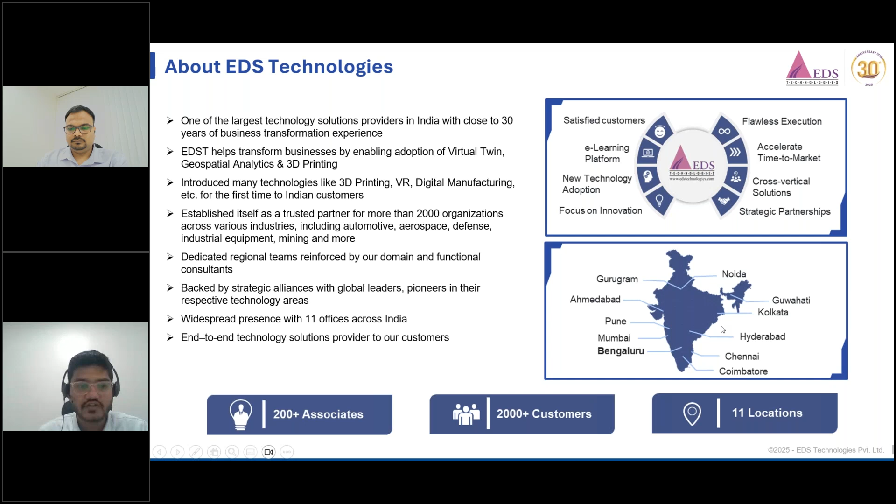In the field of GIS and location analytics, we have a strategic partnership with Esri, and for electronics design automation, we collaborated with Synopsys. We have our dedicated sales, marketing and customer support teams to ensure we meet all customer PLM business and service requirements efficiently.

Before we move to our today's speakers and technical presentation, I'd like to take a moment to give a brief about NCAM and EDS Technologies' partnership for promoting additive manufacturing technology in India.

NCAM, the National Center for Additive Manufacturing, is a key initiative supporting the advancement of additive manufacturing technology in India. NCAM is a Section 8(1) company established by the Ministry of Electronics and Information Technology, Government of India, and the ITE&C Department of Government of Telangana, in partnership with industries.

The vision is to build a comprehensive additive manufacturing ecosystem in India and to position the country as a global hub for additive manufacturing. Through collaboration with organizations like EOS and with support of NCAM, we are collectively driving the adoption and industrialization of additive manufacturing technologies across various sectors.

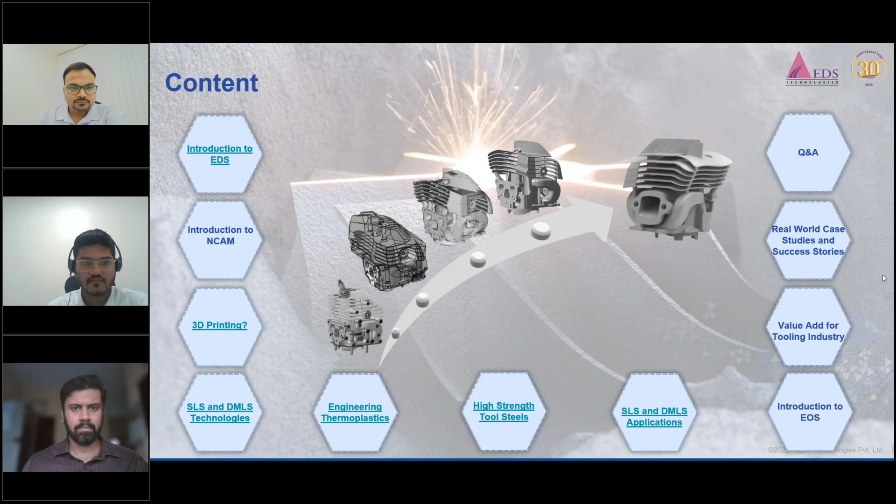So what is 3D printing? Basically, 3D printing is a method, or we may call it a process, to convert digital data into the form of physical parts. So it may be direct castings, or a direct polymer component, metal component, or ceramic component.

3D printing is solving a lot of industrial challenges in a very rapid way, so some people call it a rapid manufacturing process also.

So the steps and workflow begin with you needing a CAD model, and then we prepare that CAD model, which involves some amount of programming or CAM, depending on the different 3D printing processes.

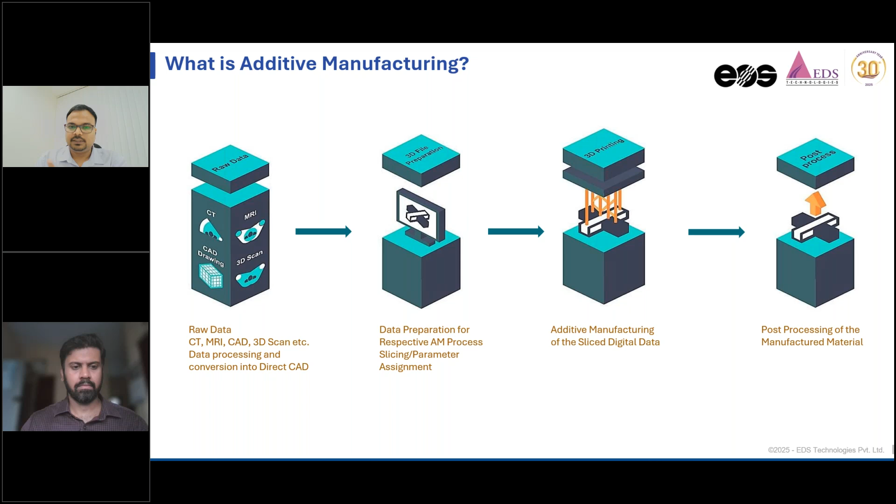We do slicing of the model, dividing it into detailed slices and information, and then we send that information to the respective printer and get our job done. After the 3D printing has been done, some amount of post-processing is done, depending on different 3D printing processes, to achieve the final component. So that's the typical 3D printing workflow that involves these stages to arrive at the final component.

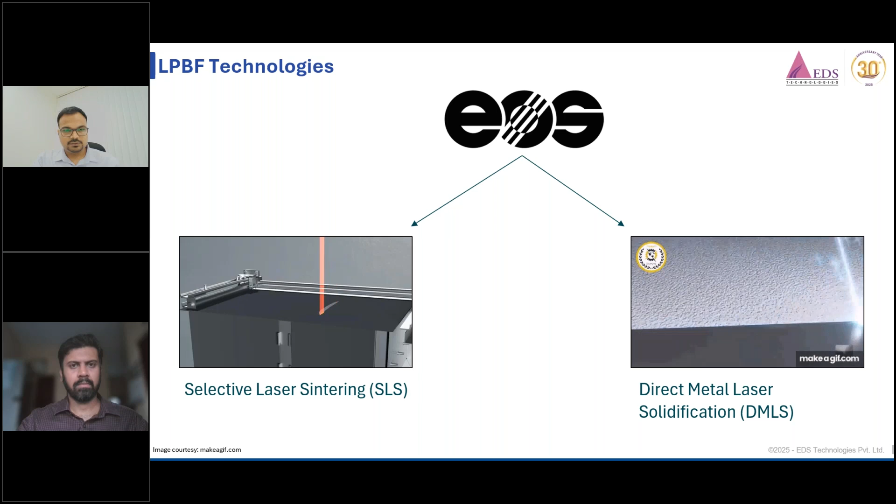With EOS, we bring the technology to India, two technologies basically. One is selective laser sintering, which is melting high performance thermoplastic materials such as nylon 11, nylon 12, and their other filled composites. And on the other hand, we have direct metal laser solidification, the DMLS process, which melts different metal alloys - it can be aluminum, titanium, copper, or even high strength tool steel. So it's possible to actually get the tool you use for your daily injection molding or pressure die casting using our DMLS process.

So we'll be discussing about these. Let's understand what the SLS process is.

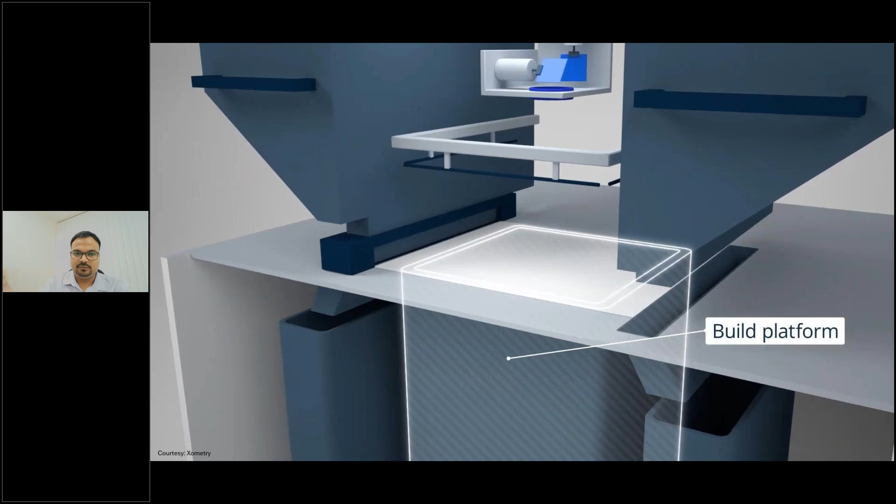So we have taken an illustration here of our P3 model, where you can see the dispensers are kept at the top, full of powder. That powder is supplied and spread over the platform - that is why it is called laser powder bed fusion. So we spread the powder, and then there is a laser at the top.

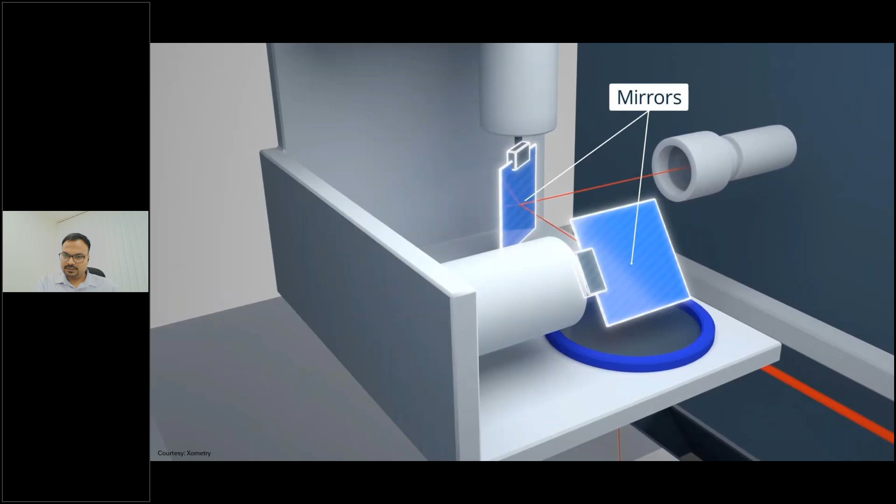There are heaters which preheat the powder during the process, and then the laser selects the areas. If you remember the slices we mentioned, those slices are addressed by these laser units, and just at those points the powder gets melted and fused - this is what forms your actual object. It happens in microns of layers, so it's basically a layer-wise process until your job is completed. It continues - the platform goes down, spreading happens, and the laser just addresses those areas.

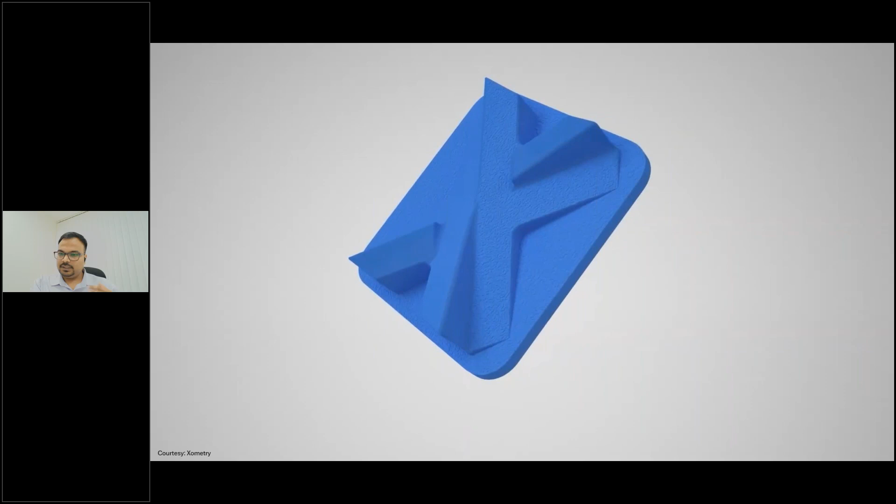So what happens at the end of the process, we take out the exchangeable frame - you may understand it as a printing bucket. We take out the entire bucket from the machine, then take out the powder cake, remove and separate the powder, and take the usable part immediately. So right after printing, the parts are usable in the SLS process, very functional without any hassle, which we'll discuss later.

So what happens to the powder after printing is over? Whatever leftover powder there is, we sieve it so impurities can be filtered, and we mix it with new powder. The mixing starts from 20% to 30% new powder, and nowadays we're able to claim a large amount of the powder - around 70 to 80% is being reclaimed from the previous cycle and reused. We call this refreshing - we refresh it with new powder, and then that powder is ready for use in the next cycle.

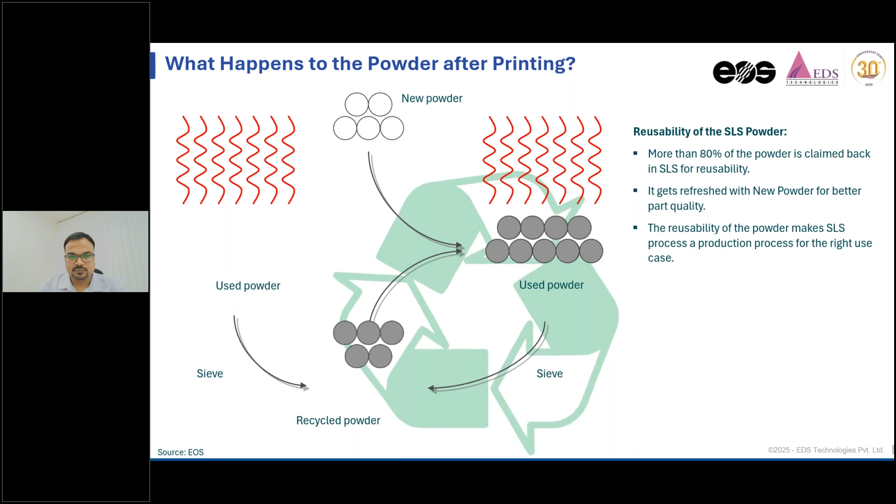This makes the SLS process more sustainable, where we are able to achieve more economy in producing the component. The cost per part drops drastically, and that is why we say the SLS process is becoming more of a production process - you can consider it that way.

So what all kinds of needs does SLS fulfill? Whether you want your prototype done, it will address that, or if you want your functional part - if you want to integrate any functionality, just like inserting a brass insert with threads, that will be taken up by all of our thermoplastic ranges. All of these parts are fully functional, and you can even do testing on the SLS component.

The other use case can be during your production process - you can print your fixtures, packaging, handling attachments, or any other fixtures or jigs required for simplifying your process. SLS will cover all of your needs during product development, operations, or production.

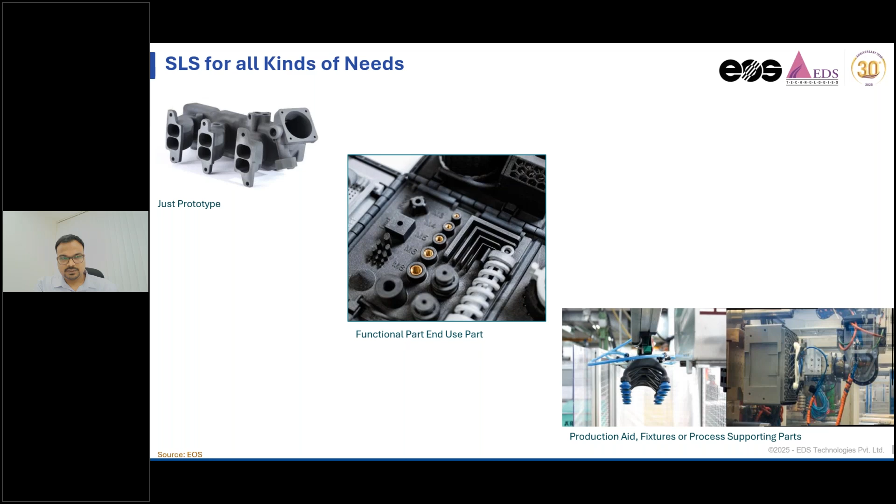SLS is actually driven by a laser. The laser is the heart of the process, and the laser spot diameter is in the range of 500 microns. It is able to produce very detailed geometry, starting from 0.6, 0.7 mm of the polymer component. So whether your component is a small scale part, a mid scale part, or a large scale injection molded part, all of the parts can be printed using the SLS process.

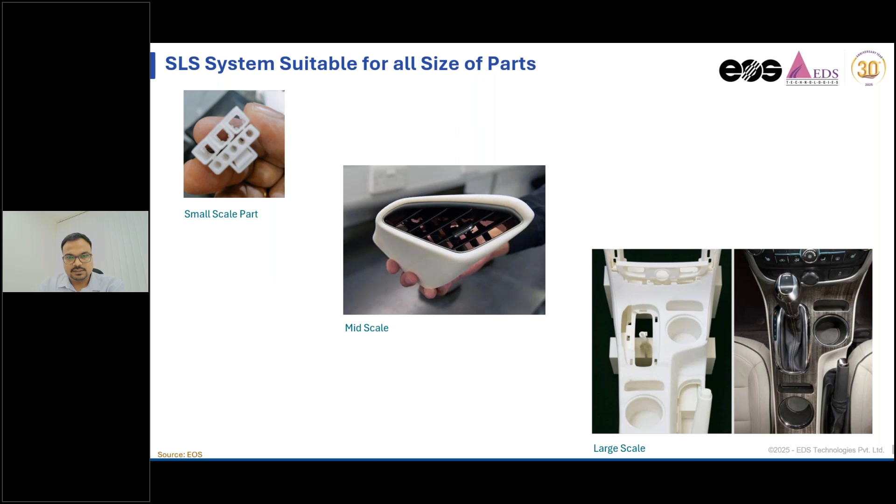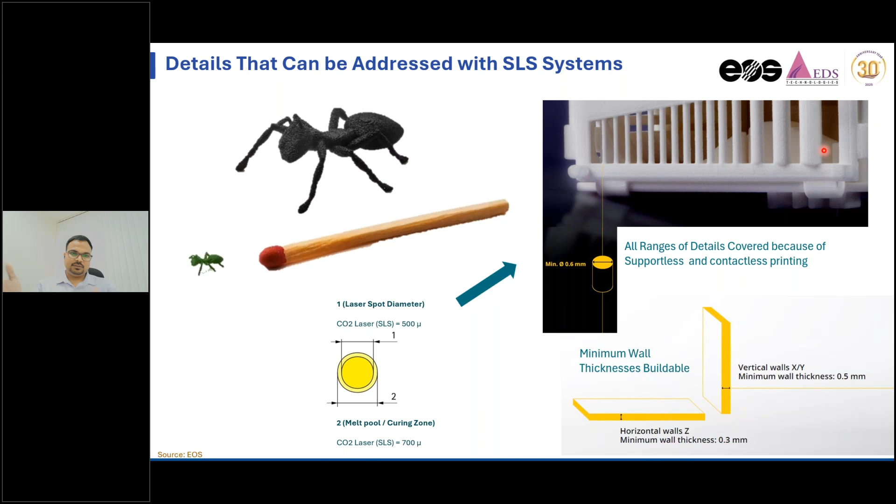What amount of detail can it address? As mentioned, it is able to address starting from 0.5 mm, because the laser diameter is 0.5 mm. So you can see the horizontal walls that can be manufactured. The minimum wall is ideally 0.3 mm, subject to the overall component size, and the vertical features that can be printed are 500 micron through the process ideally. These are the results you can see, starting from this size of feature all the way to the size of the bucket, that we are able to print and address today.

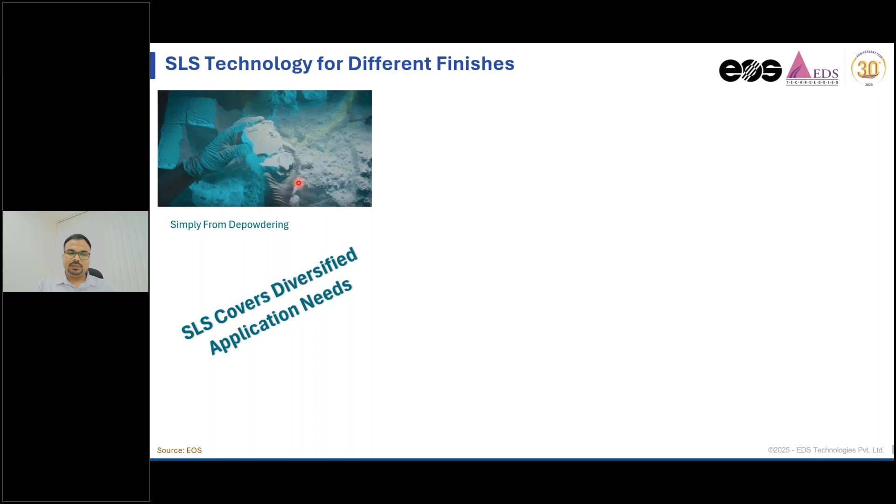What finish is achieved through the SLS process? Right after you get your part printed, you have to take out the cake along with the powder and the component, which we call unpacking. So we seek the component out of the powder bed, and this is the finish achieved right after the process. If you are okay with monocolors, white or black, the SLS parts are directly usable at the first moment. And if you want any further aesthetics, you can dye them, paint them, and coat those surfaces so they become aesthetically more appealing.

In any case, SLS parts are being used in the industry for different purposes, whether it is the component needed for aesthetic or styling needs, functional needs, or for testing.

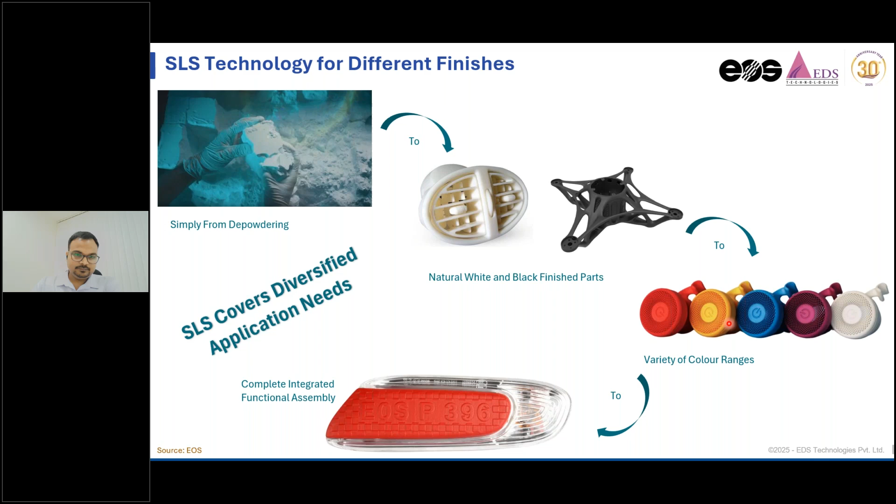So we have systems to demonstrate. This is our P110 system that we normally provide as a solution in the industry. This can accommodate roughly 20-25 centimeter components. The system holistically produces more than 600 kgs of polymer material in a year. That is very suitable for a studio friendly environment, R&D and batch production, and even for sampling if you want to do sampling for your customers in injection molding.

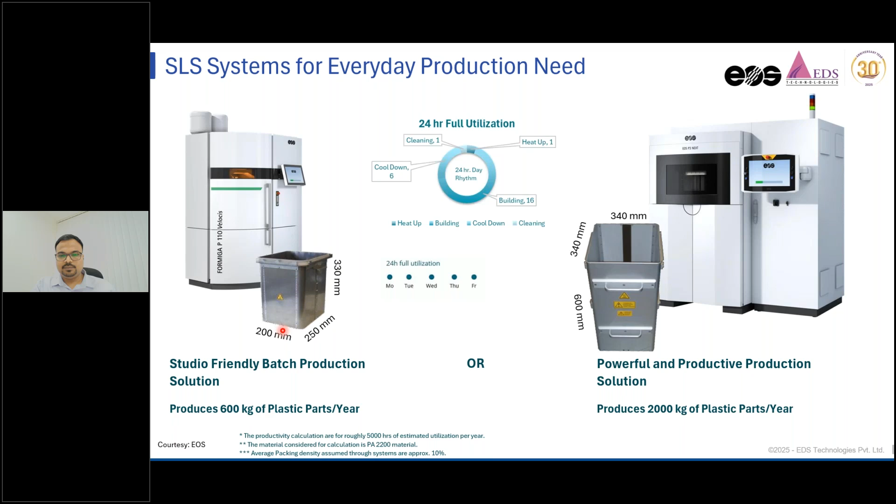Then we have our flagship machine, P3 Next, which is way ahead in the segment and produces more than 2 tons of plastic parts per year today. You can imagine these machines as daily production machines for your day-to-day plastic component manufacturing.

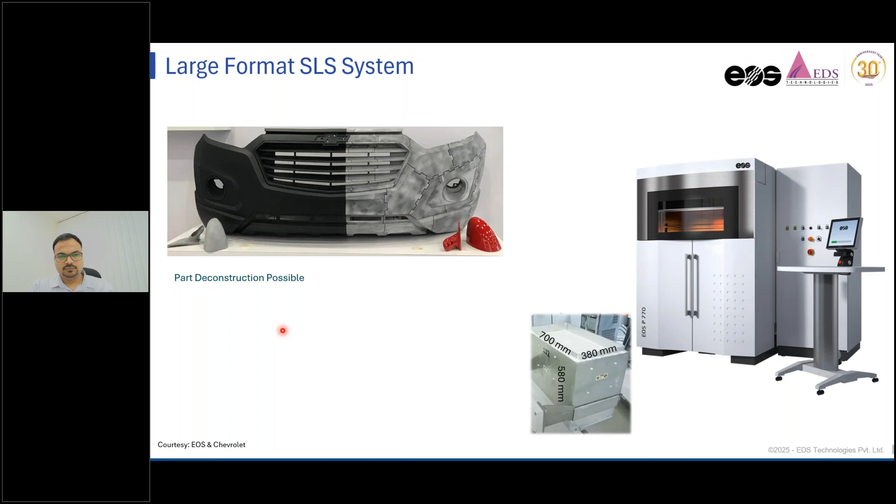We also have large format SLS printing. If your component doesn't fit in one go in the printing volume, the concept is we need to split it and then manufacture it, which we call deconstruction. So we have a large format printer with dual lasers, able to address 0.7, 0.8 meter kind of dimensions in one go. You can imagine large components for exteriors and interior components, and of course large components in automotive and different industries.

What materials do we offer in SLS? Today we have nylon 11, the whole nylon 11 series, and nylon 12 series for different applications. We have pure nylon 11 in white color and nylon 11 in black color. We also have nylon 11 climate neutral material, which leaves almost no CO2 emission behind when manufactured. We have flame retardant material for day-to-day applications, for the EV market and others which want flame retardancy features. We have direct material for that.

We have composites with us. In nylon 12, we have highly reusable nylon 2220 today. If you remember the refreshing ratio I was discussing, in this material we are able to claim 70% of the powder from the previous cycle. And in a material called PA 950 HD, we are able to claim 80% of the powder from the previous cycle today, which makes it more economical and adds more reusability in the process, making it more sustainable in production technology.

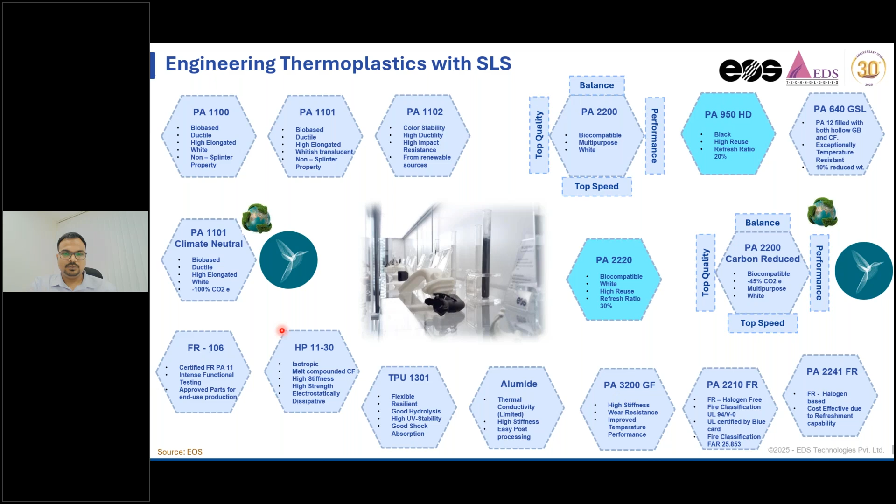We have PA 640 GSL, which is 10% lighter than normal nylon material, used for lightweight applications, and it's a carbon-filled composite material. We have glass filled material and other flame retardant nylon 12 materials, which are used for flame retardancy. We have an aluminum and nylon mixture, and a flexible material called TPU, which is a rubber-like material for different applications and industrial needs. Most of these materials are biocompatible and very safe during the process, so there is no hassle in operating the systems and handling the material.

When I speak about the benefits of the SLS process, it has many benefits. First of all, you don't need any tool to get your component. Unlike other 3D printing processes, it doesn't have any support structure involved, so you get your component directly without support structure.

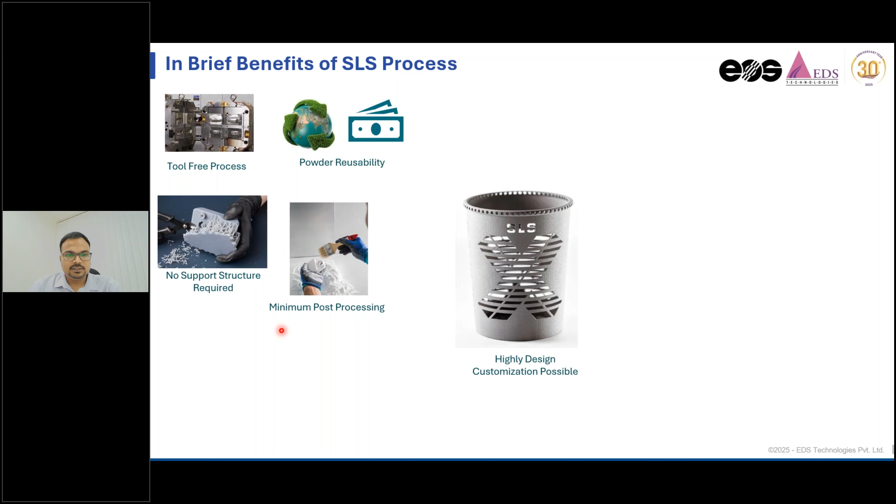Because of high powder reusability, these are more economic. There is very little post-processing, so immediately after printing you can start using the part. And because there is no post-processing involved, you don't need to use any chemicals or washing processes typically done in 3D printing.

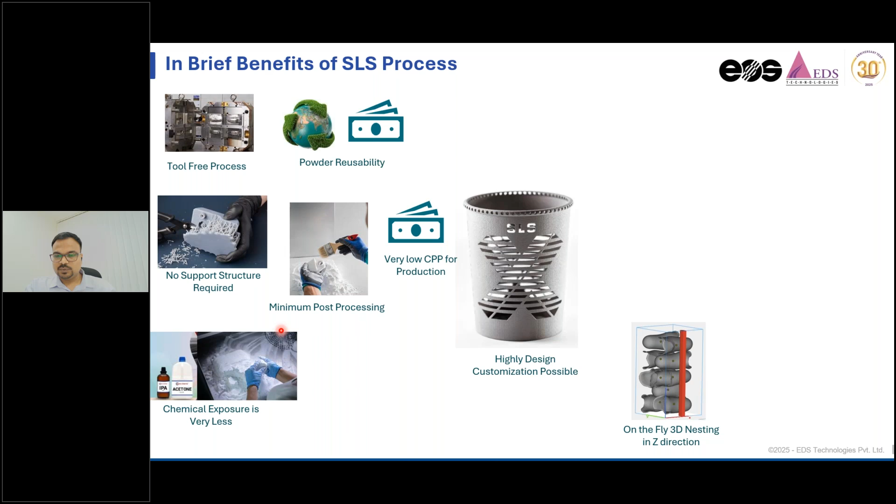You can imagine completely filling your printer and using every corner of the space during the process - we call that 3D nesting. You can directly fill as many components as possible in this space and use the printer as a production machine, which makes the cost per component very low.

We have glass-filled materials which are more robust, used in high strength polymers. We also have high temperature service materials and flame retardant materials with us. There is no post-curing, as I mentioned - not much post-processing, so there is no curing, and immediately after printing the parts are usable. There is no UV damage, and all of these materials are fully functional, so they integrate all conventional means. You can actually insert functional inserts and use it multiple times. So this plastic performs very well, just like injection molded plastics.

We have fine detail resolution with us, FDR, which is able to address features as low as 0.2 mm, used for very miniaturistic designs to be addressed and printed. And we have watertight material - immediately after 2 mm, you can claim water tightness on our component. So these are all the benefits of the SLS process.

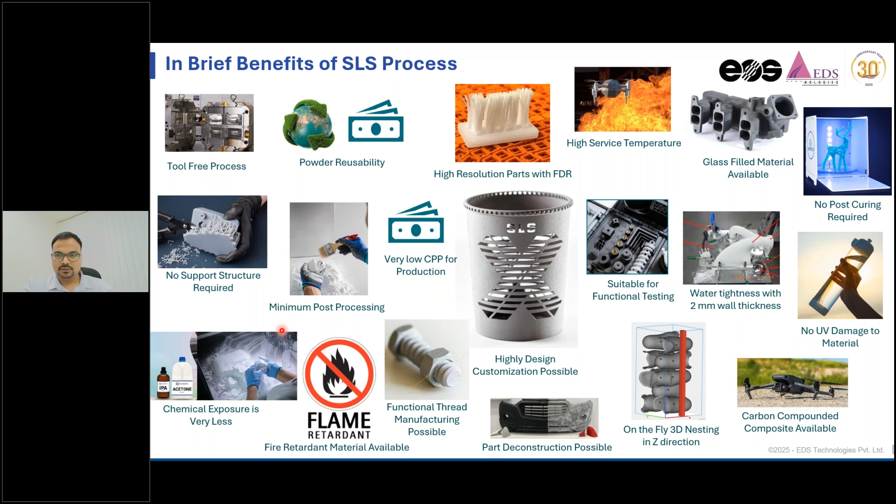Now let's have a look at the metal printer, which is DMLS. This is our M2 machine, and it's basically a micro welding, automated welding process which happens in an inert atmosphere. You can directly get your castings and toolings done out of it, including injection molded tool inserts and pressure die casting tool inserts directly.

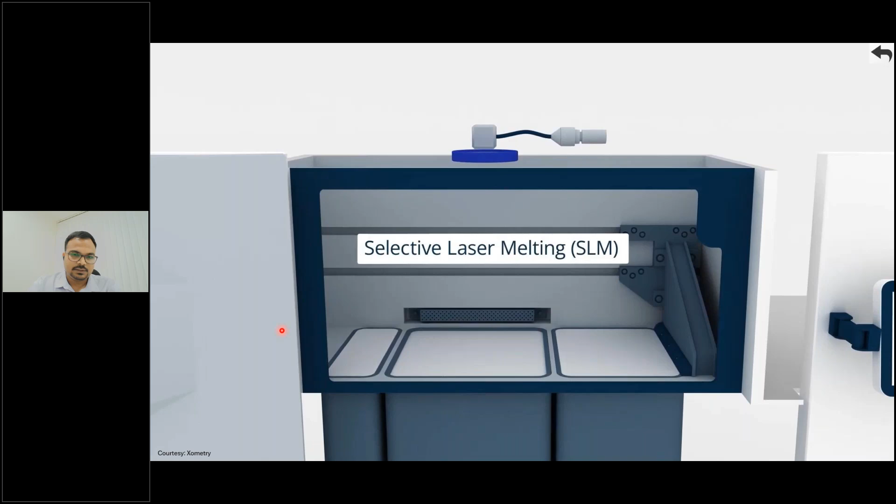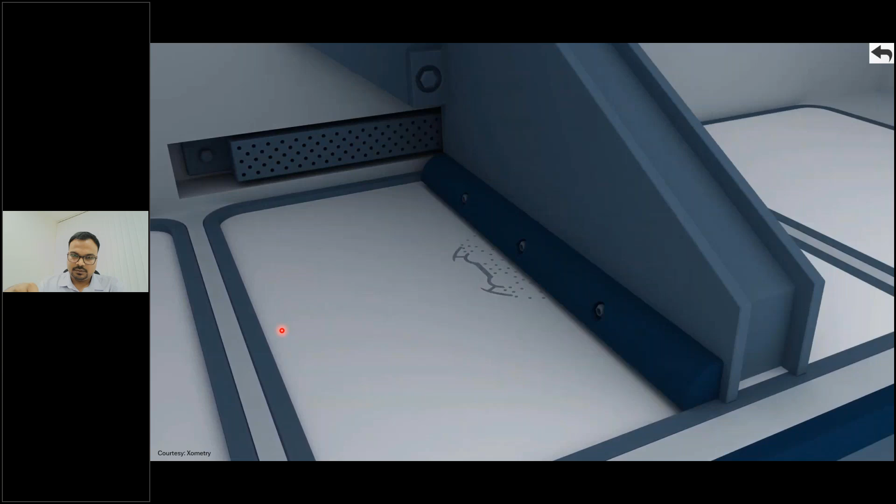We have a lot of materials to offer, including high strength tool materials. As I said, it happens inside an inert atmosphere like argon or nitrogen. The powder is fed from the bottom to top, and the recoater recoats the powder in very fine layers since it is a powder bed fusion process. On top, there's a fiber laser which melts the powder completely - more than 99.5% to 99.6% density is achieved across aluminiums, and in steels you get 99.7% to 99.8% density in your tool. So these are completely solidified materials that you get out of this printer.

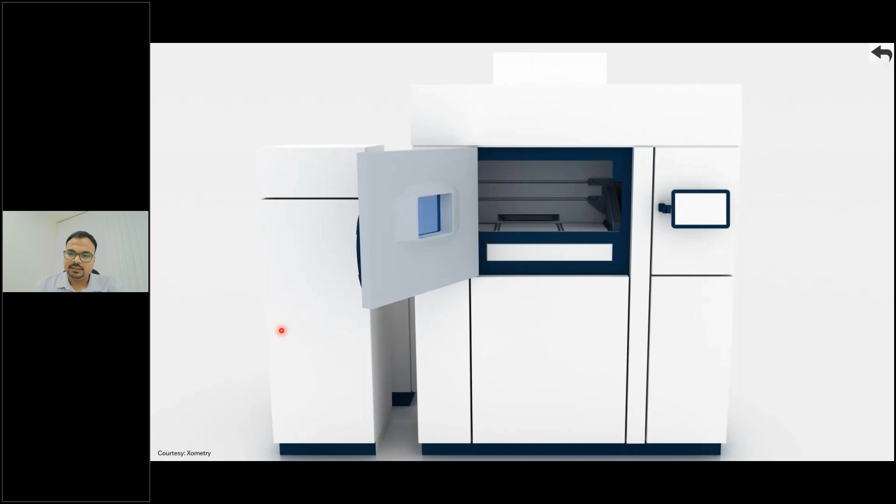And it addresses very minute details. The laser diameter is just 18 microns, so it is able to print features starting from 100 microns during the process.

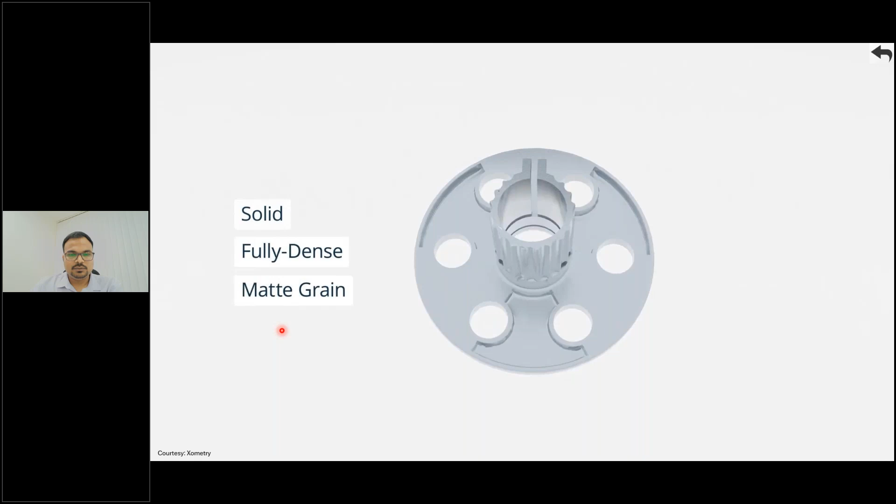Immediately after printing is done, we take out the model and put it in the furnace for relieving the residual or thermal stresses induced in the part, remove the support structure, and do the desired post-processing to control tolerances and get your functional component. So these materials are directly machinable - you can do EDM, wire cut, or in fact any kind of post-processing. You can even do hardening after printing, after the heat treatment is done, to improve the surface hardness.

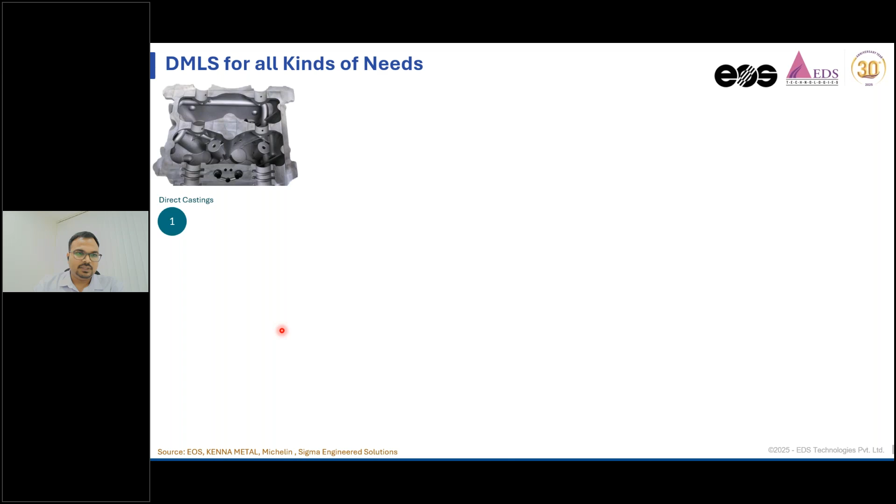So what DMLS addresses for the tooling industry is that your direct castings can be printed, whether ferrous castings or aluminum castings, in a very great way. These printers will be able to print these systems. We can solve your tire molding problems - in tire molding, you have detailed sipes, 3D sipes, or in fact the entire tire mold segment can be printed directly from the printer, which cuts down the lead time and the hassles of manufacturing the sipes.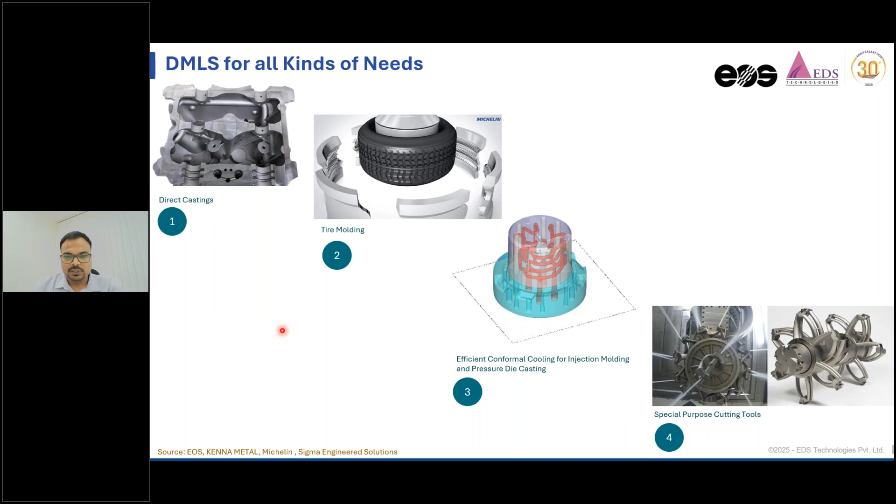We also have a solution for the injection molding and pressure die casting industry, where you can increase efficiency and tool life in a direct way for your day-to-day molding purposes. This process is also able to address direct cutting tool manufacturing - not all cutting tools, but at least special purpose tools and tools which have complications during manufacturing, where there are difficulties in balancing and so on. The DMLS process can address those applications.

I'll pull up one application where a company called AMEXCI has printed a series of 36 cylinder heads, which are directly from pressure die casting. You can see the volume of the system, the printing volume, and this is what the system is - it is able to print cylinder heads directly coming from high pressure die casting.

3D printing is producing these cylinders at a rate of 1 cylinder per hour, and the cost has drastically come down, matching with pressure die casting. So today, for different applications, 3D printing processes are being optimized so that cost can come down, performance can be enhanced, and you can get your component faster than the conventional process. You don't have to wait at all for your component.

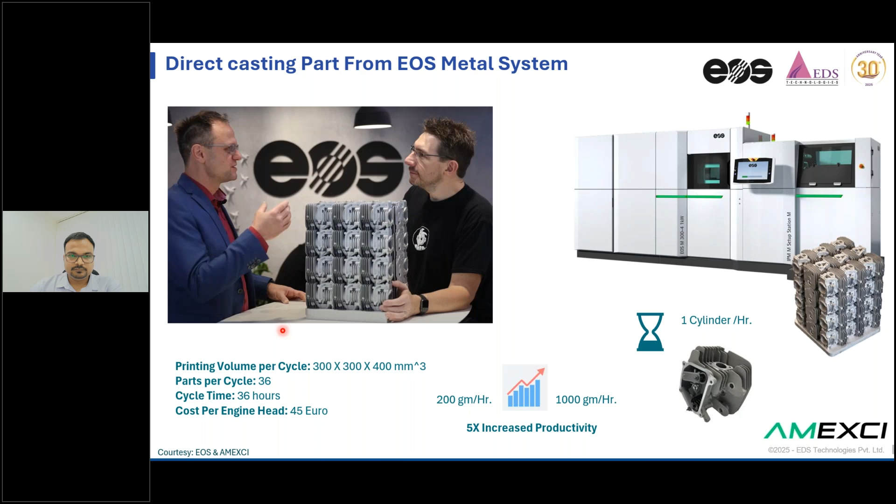The second application, for tire manufacturing, is that you can either make sheet metal sipes directly for your mold, or get the entire mold segment done out of it. Let me highlight this. Traditionally, these are the steps you follow to arrive at your final sheet metal part. In the additive way, we just need a 3D model, put it in a 3D printer, and get it printed to achieve the final shape.

In the 3D printing process, a lot of the middle stages responsible for achieving complicated features in the sipes are directly eliminated, and you can address any amount of design complexity in the tooling getting printed.

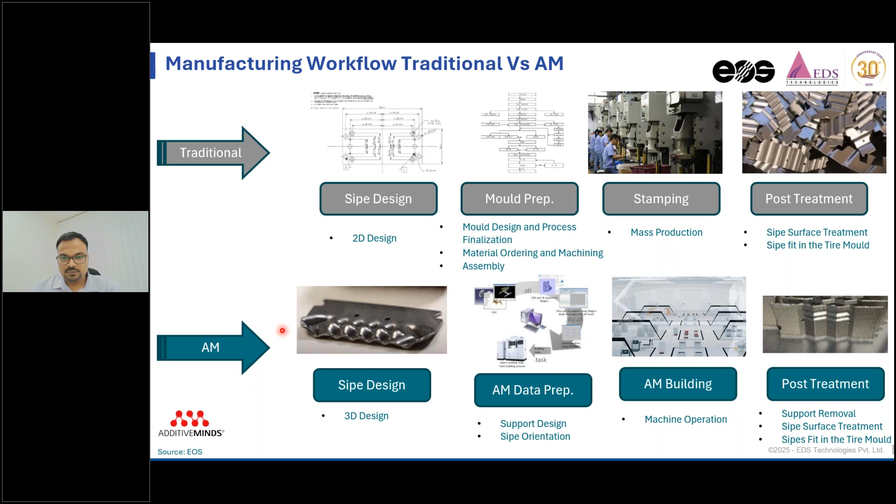This is why AM is being used in the tire segment - there are a lot of process complications whether you are getting your tire mold segment printed through castings. So many steps are involved in casting, and even after this, you get defects and rejections in the process.

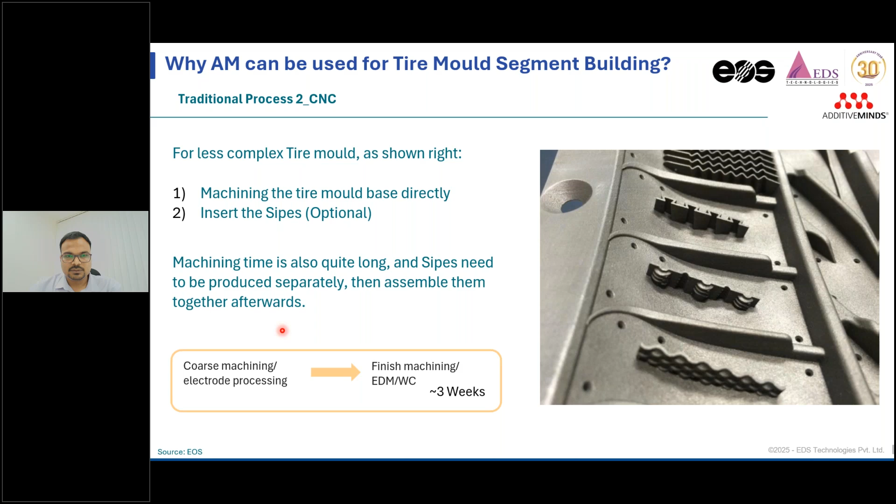Secondly, if you try to manufacture using CNC, it takes a huge amount of time, tooling, and energy to achieve the features, and sometimes it's not even feasible through CNC because of undercuts and other things. All of those things can be addressed through 3D printing.

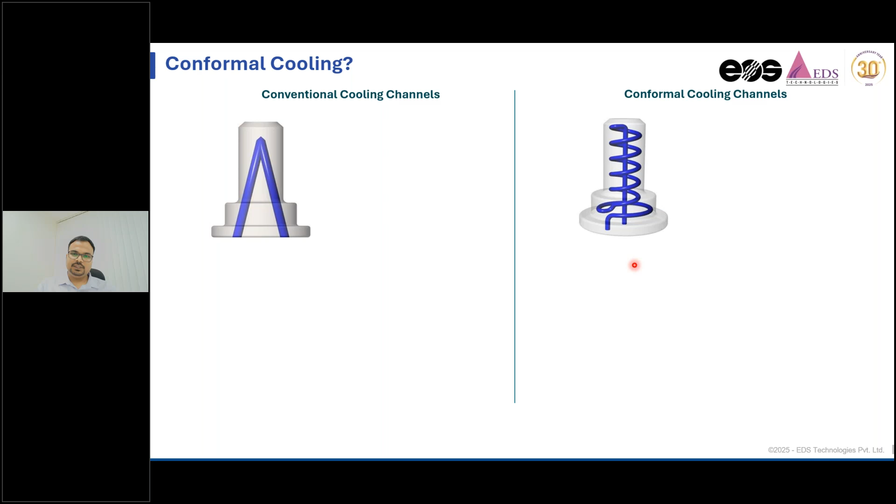With this, let's understand our third application, which is conformal cooling. So what is conformal cooling basically? Take an example of an insert - you can see it has a blue colored straight cooling line. With 3D printing, we are able to come very close to the molding surface. This means the operating temperature range of the tool can be well calibrated using 3D printed conformal cooling rather than conventional cooling, which has limitations of drilling angles, accessibility, and critical wall thicknesses. Everything comes into picture when it's conventional.

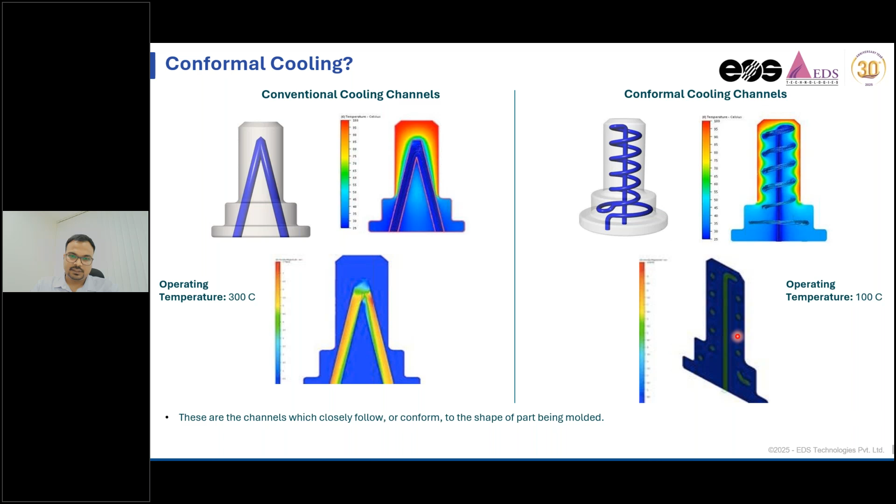With 3D printing, we are able to drop down the temperature range of the mold's running temperature, and this way the cycle time can be reduced, and other benefits like rejections can be dropped down too. There are a lot of benefits of introducing conformal cooling concepts in day-to-day molds for injection molding or pressure die casting.

Let's discuss the case study.

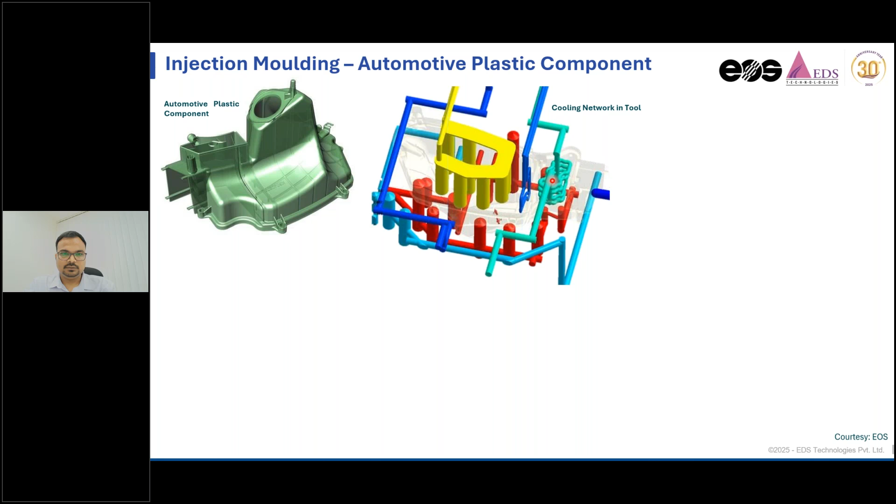So this is one automotive plastic component we have taken, and this is the cooling network in the mold. This is the area where the problem was actually lying. There was a critical cooling condition, and the part was getting rejected due to hotspot generation here.

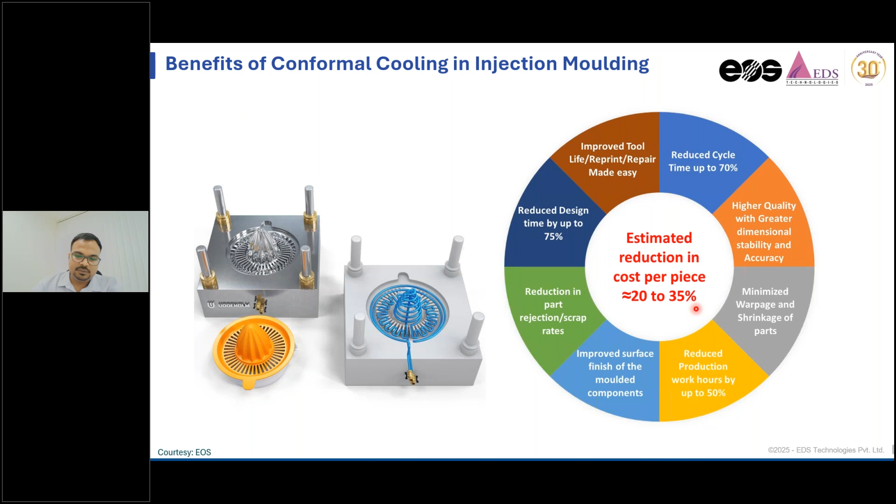So around 30% rejections in this case were reduced, and productivity was increased by 20% in the plastic injection molding. This is a great concept solved by DMLS and conformal cooling with injection molding. So you can imagine the estimated benefits: reduced cost per component of approximately 20 to 35%, reduced cycle time, improved tool life, and reduced rejection rates. All of these benefits come into picture when we use the conformal cooling concepts.

In pressure die casting also, this is one example I have taken where the casting was having a great shouldering effect inside. That was a real defect during the casting process. So simulations were saying that the cooling was not efficient, and we tried introducing conformal cooling on it, and then this complicated portion only was printed.

So this is what is also possible. We call this hybrid printing. We only have to print the amount or the portion of the mold or the tool that has the geometrical criticality. You don't have to print the entire mold or entire component or entire tool altogether, and the process well supports it.

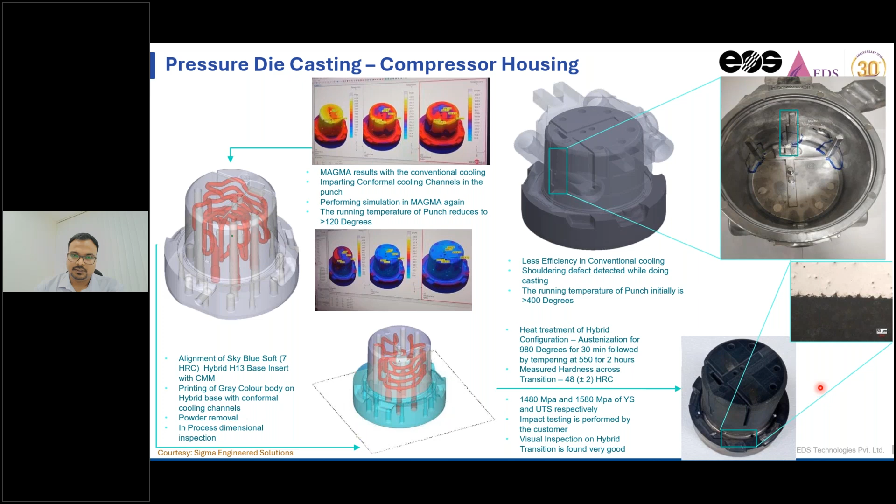So we printed the complicated portion and calibrated the hardness across the mold, and it performed well. The joints were completely fine, and they gave high strength at the transition also where we joined it, and the problem was solved basically. So conformal cooling is able to reduce die issues, reduce rejection, and improve the performance of the overall molding process.

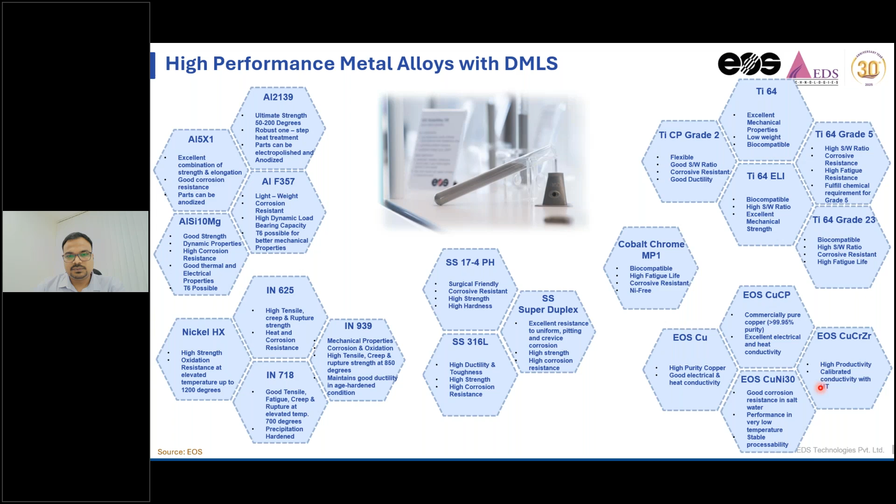So what material do we have to offer for the direct component? We have high strength aerospace grade aluminiums and normal grades of aluminiums for direct castings. As I said, we have the titanium series of materials. We have super alloys used for high temperature applications. We have copper alloys, stainless steel series, and high strength steels to offer.

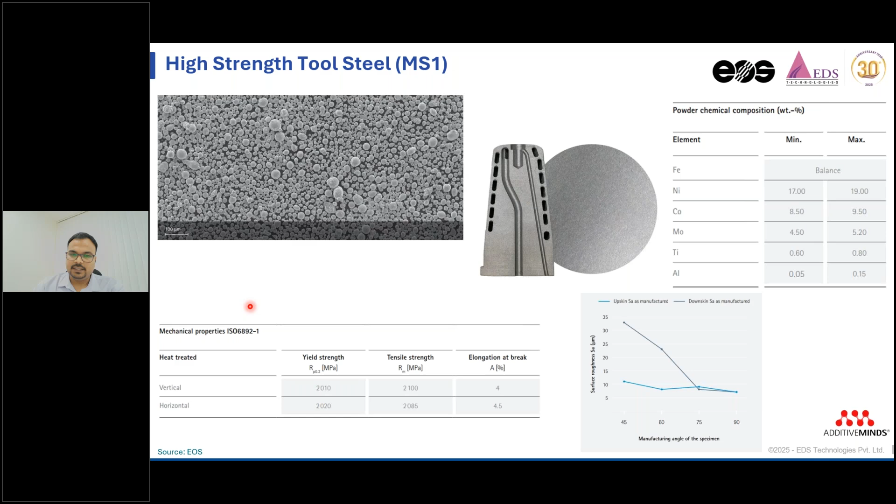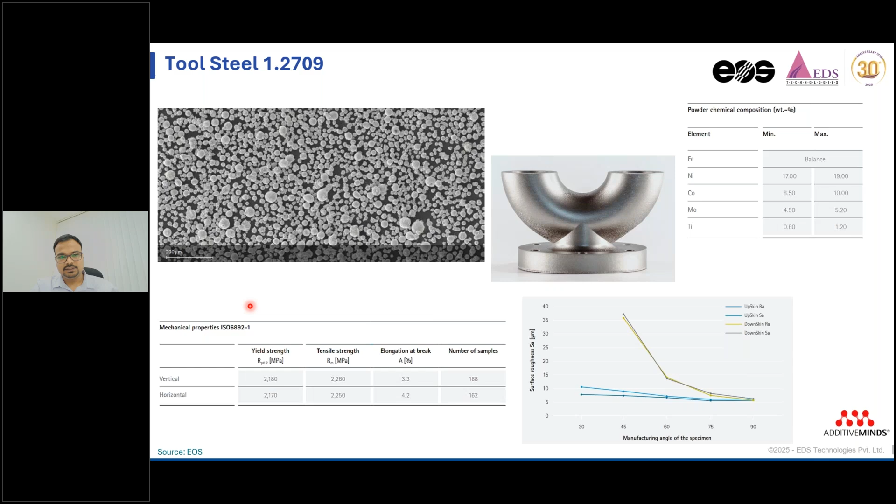Talking about material, the highlight is we have high strength material which can directly cater to your tooling requirement, whether you want to replace your injection molded tool. So we have maraging steel, which is a martensitic aged alloy. It is a high strength material, and you can calibrate the hardness as per your need. Then we have tool steel 1.2709, which can print your tool directly. We have CM55, and we have stainless steel tooling material also.

And over the year, you can again imagine the tons of steel being produced for your tooling, day-to-day tooling applications. So you don't have to actually print the entire tooling with 3D printing, but only the areas which have criticality in terms of cooling.

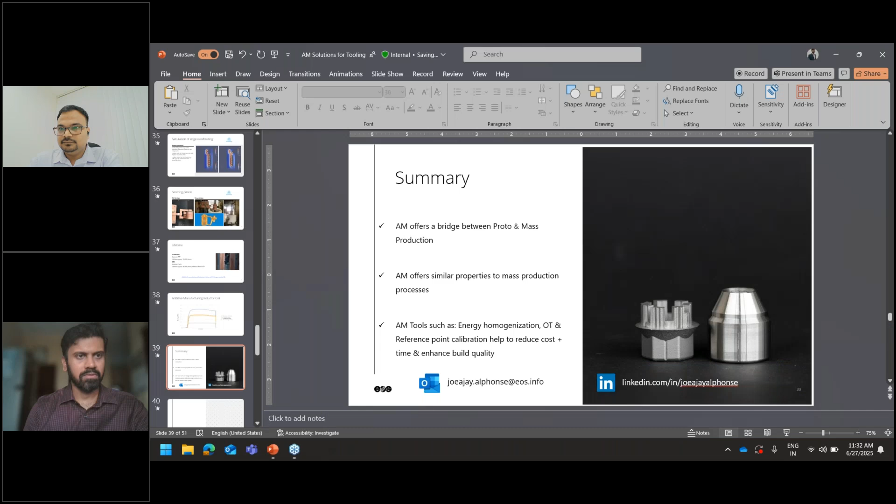I think you have had a very detailed session with Arun, and I have little content that can touch base on some of these topics for the day. I have tailored the content as below.

Number one, who EOS is, a little background about the company and what solutions we offer, and some of our customer success stories. EOS is a German company, started in '89 onwards, and we have two major products, one on metal, the other solutions are on polymer, and our metal systems dominate the market. We are represented in about 15 countries, and we have a few more partners in few other countries.

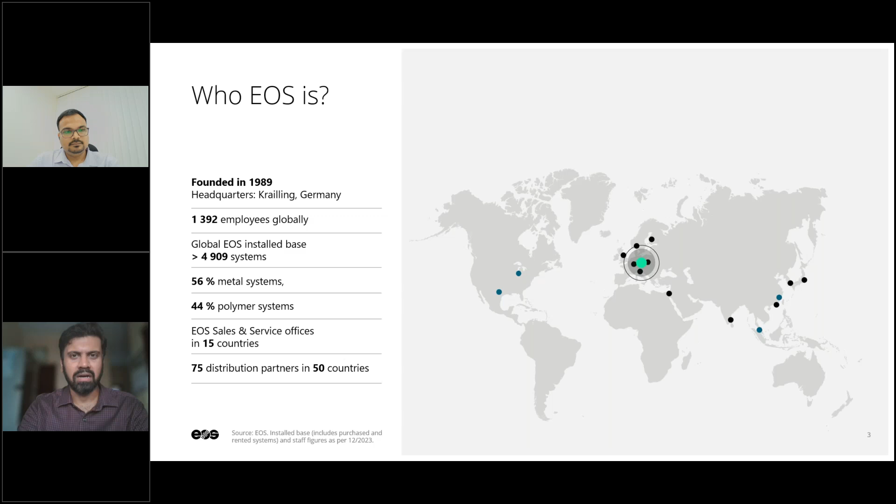We are a nearly €500 million company, and if you see the patent history of direct metal laser sintering, you can very well see that EOS was the first company to commercialize metal 3D printing for the entire world. Everybody started with stereolithography on polymers, but when it comes to metal, we were the first one to market it.

Until then, there were many patents, many research that were going on. If somebody wanted to buy a metal 3D printer, it was only with EOS. Today we are 36 plus years, and we are located near Munich, actually, in a place called Krailling.

The solutions that we offer goes this way. If you have a concept, if you have a part in mind and if you want to realize it, we take you through the entire path. We work with some of our partners to optimize the product design in terms of CAD and CAE, and then we print the product in our machines, in both polymer as well as in metal machines.

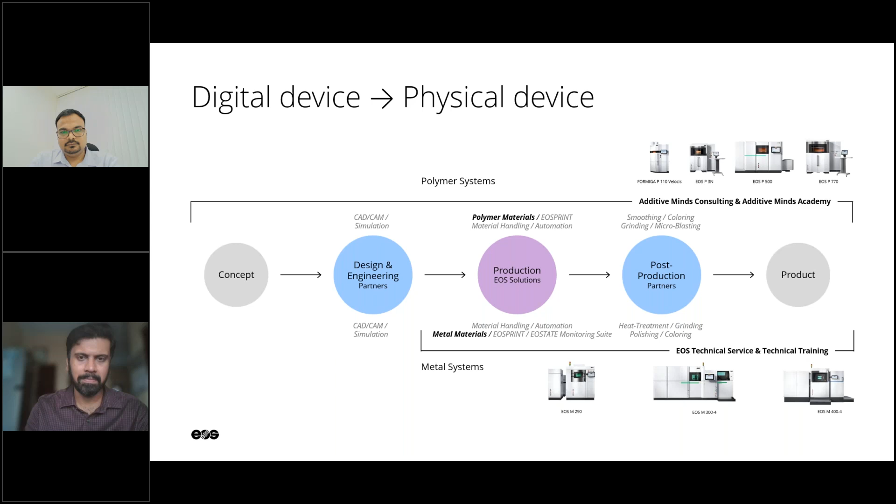For post processing, we partner with some of the traditional processes, like electroplating, and some part finishing, and then you get your end product in your hand. So that's how, right from your digital device until you have the physical device in hand, you have the entire chain with us.

The solutions that we offer, of course, earlier 3D printing was termed as rapid prototyping, and this was mainly driven by the automotive market. This was much ahead before the product reaches the market. People were using rapid prototyping for aesthetic purpose, for visualization, conceptualization, so on and so forth. Rapid prototyping was fantastically driven by the automotive side.

But what we are seeing right now is some of these products are being currently used in the aviation industry as well as in the space industry as direct products. To reach mass manufacturing, we see there is a bridge that is happening where the products are currently introduced and can replace to some extent.

This again is typically driven by automotive and a few other manufacturing industries such as heat exchangers, some of the semicon industries, so on and so forth, and also the medical industries where there is 1:1 manufacturing going on.

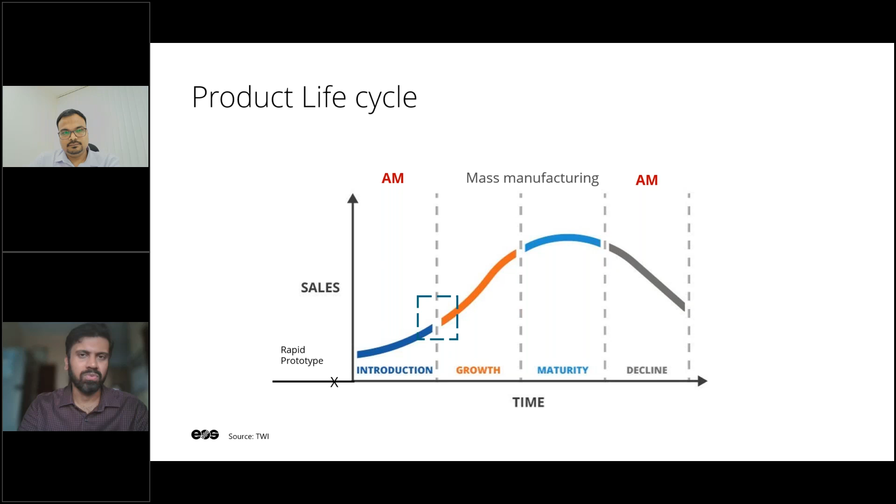Now, let's say there is a product A, and you need a quick proto within a week or so. Typically it's done with either the 6061 material or AlSi7Mg with sand casting. This is how typically within a week's time they get a part in hand.

What we have at EOS is we have the same materials, AlSi7Mg, and we also have AlSi10Mg, which is A360, and ADC 10, which is the die cast material altogether. The same material which you would be die casting is currently now being also 3D printed.

When it goes for pilot production, before a product is deployed or released to the market, what die casters do is typically make 50 or 70 odd pieces of these parts and then have a tool made for it, and they call this pilot tools or pilot production.

This is typically done with a very cheap steel, and within 6 weeks of time you have 70 parts, or even 100 parts, and these parts would be tested for their mileage. Basically they put it in environmental chambers and blast it with all sorts of corrosive media, and then see how far the material survives. This is how they determine the mileage of a product.

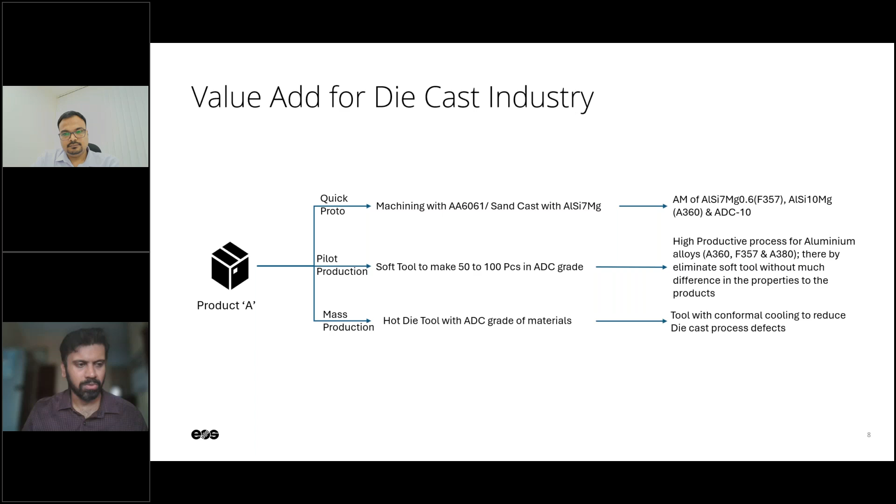Secondly, we also have mass production coming in. For that, we don't have the scalability as of today, but we hope to have it. We definitely want to see much better material efficiency throughout the entire process chain in mass manufacturing, so additive manufacturing could help. Right now, what we offer is the hot die tool steels that you can readily use and reap some benefits. So Arun has explained the different grades of steels, right?

In the plastic industry, a similar approach is also followed. Either they take a block and machine it, or they use the material extrusion process. With SLS, the selective laser sintering process for plastic, there are no support structures, which means if you print 100 grams of part, that 100 grams comes in directly. There's no wastage, no extra material that goes in as with material extrusion. Directly you get it. For pilot production, typically they use vacuum casting.

But again, this is not a one-to-one material that directly translates to injection molding. There is definitely a delta happening there. With SLS, you have the same material properties that you can achieve in injection molding also. And you can have multiple such products stacked and printed all together. So not just one or 5 parts together, but even short series production is possible with the SLS process.

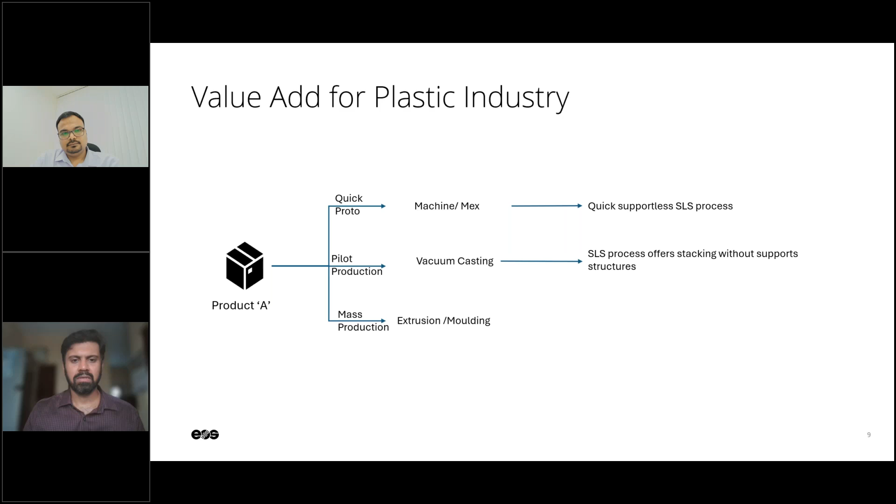For mass manufacturing, similar to die casting, we have the tool steels that come in with the benefit of conformal cooling. You have much better productivity also. So I addressed generic parts, and now we go to tools.

These are the part properties when we compare additive manufactured material versus standard die cast or permanent mold casting, gravity cast, or even sand cast, so on and so forth. You can see our properties are 1:1 actually, or very close to 1:1. So let's say if the property is overperformed.

Let's say there is an automotive customer who is using 3D printing and overperforming in prototyping, and when it goes for mass production, you have the poorest of strength. The delta is going to be very big - the performance in prototyping might be about 60,000 kilometers, and when it goes for mass production, your kilometer range is somewhere around 20,000. Does not match at all, right? So we tend to match the 1:1 properties - what you expect in mass production is what you need to also have in the prototyping stage. That delta is currently addressed by EOS, and here is the evidence you see here. The properties match almost 1:1.

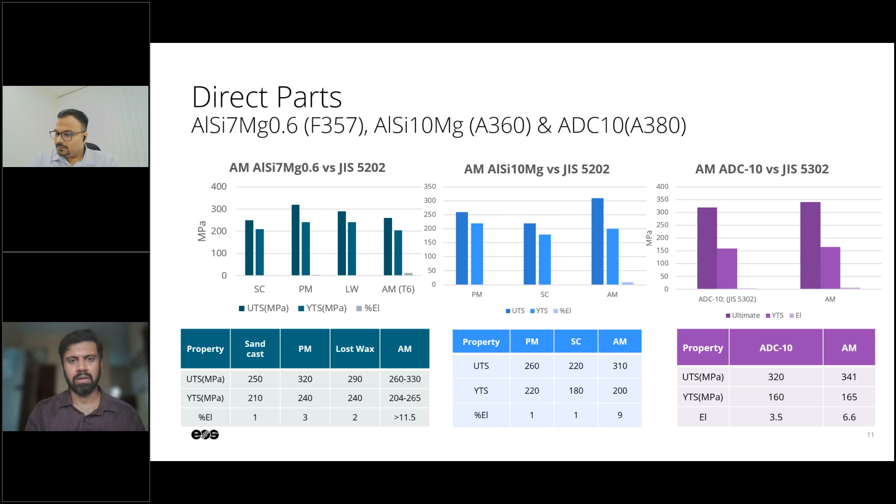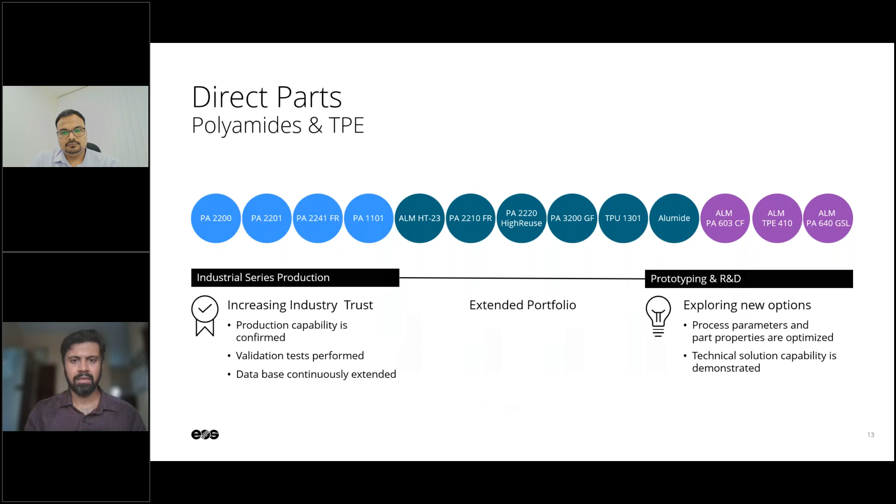In polymer for direct parts, as I said, we have the injection molded properties being met, and primarily this is done by two materials - nylon 11 and nylon 12. We have different filled materials in each of these categories - some are mineral filled like aluminum, some glass filled, and some with additives for fire retardancy and ESD, and so on. Each of these fillers contributes to certain expected properties, and we have a wide variety of materials you can use. If you compare the properties again, in additive manufacturing there are two widely accepted technologies as per VDI 3405 standard.

One is material extrusion, fused filament fabrication. The other is laser sintering. The standard says these are the two major, widely accepted processes. If you compare expected properties per this standard with EOS, properties match almost 1:1. Even comparing with injection molding standards for nylon 11 and nylon 12, properties are very similar - 45 megapascals in injection molding versus 48 megapascals in laser sintering. There's only a marginal difference. So that's where the technology is going.

Here's something I wanted to share on break-even. Let's say this is a product that goes into complex assemblies, sometimes in very limited quantities, because not many products go into 100,000 or a million shots. So for a limited product, the cost of tooling is going to be very high. The more products you make, the more the tooling cost gets amortized, bringing the product cost down. But when the geometry or business needs change, you hit a bottleneck - either manage the break-even, or use a low performance tool and keep repairing it.

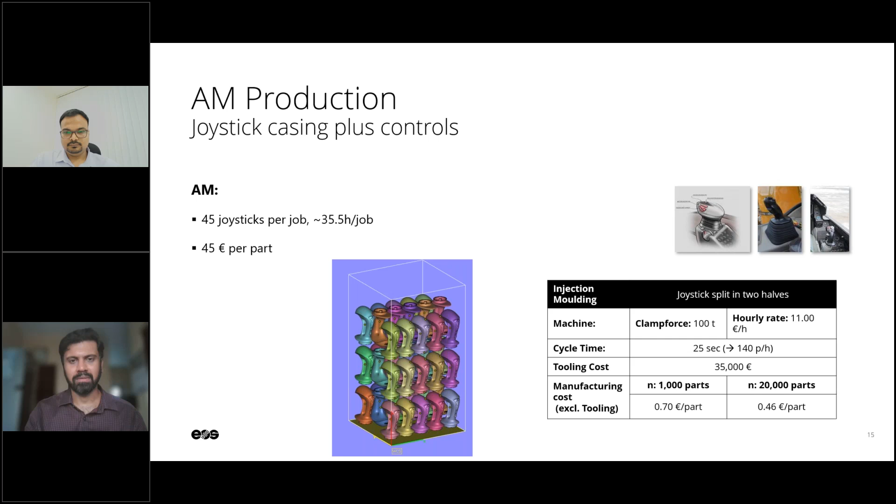In terms of tools, here's an interesting fact I read from NADCA, the North American Die Casting Association. Of the 100 defects that diecasters have, the majority - nearly 78% - is contributed by process defects. The remaining 20%, which can be fine-tuned and so on, are caused by manual interactions. This is where we see the benefits of conformal cooling.

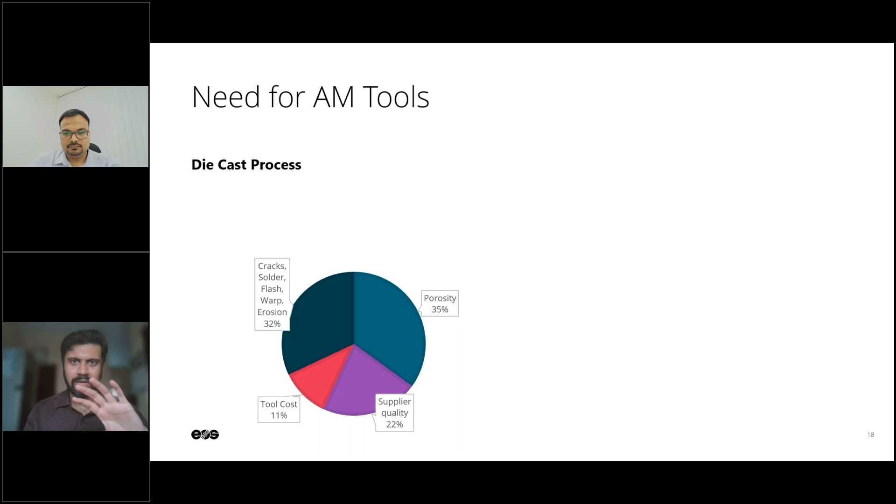In terms of injection molding, the requirement is a bit different, although we don't see a direct quality benefit from conformal cooling. Sometimes it's definitely there for complex, large parts, thin wall geometry and so on. But the larger contribution is through productivity - reducing the cooling time altogether, reducing non-value-add time.

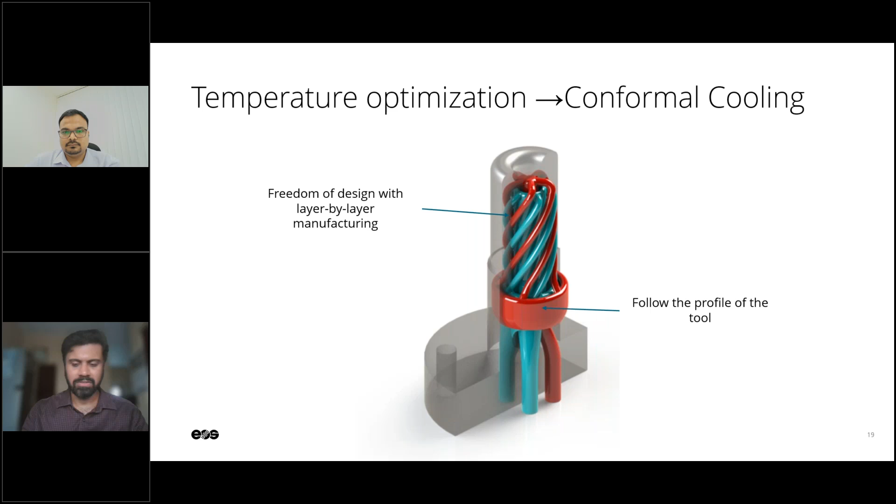One example I came across was very beautifully designed. How can somebody design this conformal cooling geometry? Very, very complex. So many people ask us, what are the design guidelines for such conformal cooling circuits?

These are our three primary recommendations. Number one, take the part contour - have an offset from the part contour with some distance. There's also a guideline depending on the material. Second, don't have blind channels or right angles, but smooth channels so the coolant flows smoothly. Third, don't have too many branches - keep just a few, so pressure losses are minimized. So, three major design guidelines.

We can have a detailed discussion after this call, or later, to see how we can help you design a conformal cooling circuit.

These are our tool materials currently available: 1.2709 maraging steel, H11 material, 1.2343 hot work steel, CM55, and Corrax from Voestalpine, also called M789 material. All such materials are available for conformal cooling tools.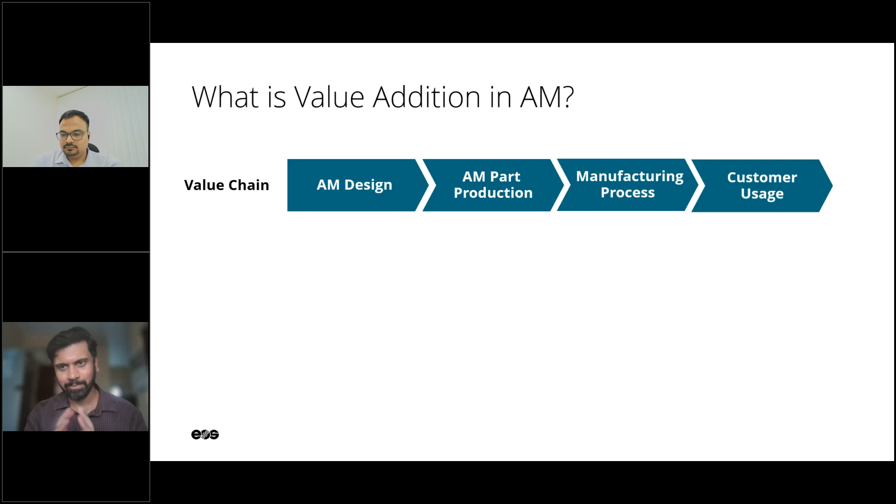Some stories that we wanted to share. But before that, another question often asked by our customers is: I have a complex design, I want to 3D print it. This is where we often talk about how it works perfectly in a theoretical environment, but that's never the case practically. The direct design you see isn't always printable altogether, because the product is either assembled or has finishing issues - such practical bottlenecks that we see while actually working on it.

So what we recommend is, at first, look at what is the functionality of the part and then work back on the manufacturing processes. Everybody wants to have the theoretical design, whatever the software has optimized, we directly want to have it, but there is always a bottleneck on the manufacturing. Not every process is 100% perfect.

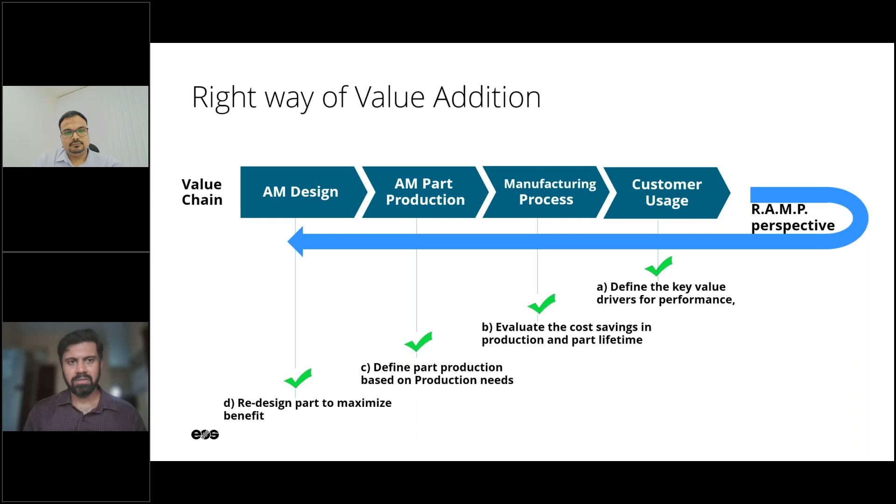So we work back on the manufacturing process, and one such process is additive manufacturing because it works in two axes parallelly, X and Y. We have the design freedom - that's the benefit of additive manufacturing. So there are also some design rules that come in, and one such design rule is the 40-degree rule - anything below 40 degrees is going to need a support structure.

What happens is when you have such burnt marks, the surface is very poor, plus the buildability is lost. And we talk in terms of 20, 40, 60 micron sizes, so even if there are some blockages there, it's going to have issues. So we tend to avoid such burnt marks.

So what solution we currently offer is, we section the part at first. We select different layer thicknesses - some layer thicknesses we can run in seventh gear, basically highest productivity, probably 60 or 80 micron layer thicknesses. And when it comes to a very critical area such as this, where the channel is almost horizontal, we control the energy and also reduce the layer thicknesses.

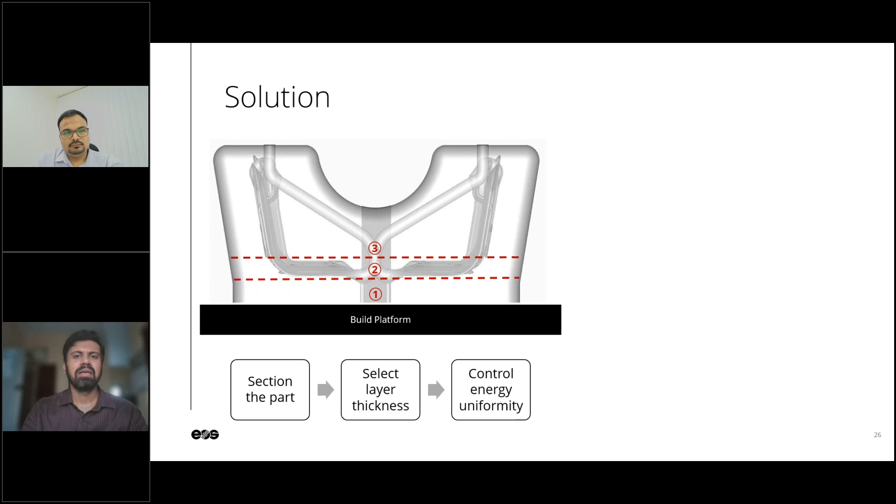For smaller layer thicknesses, to have the detailed sections, we control the energy such that it is uniform, such that it does not have any stress concentrations. We typically come across stress concentrations in mechanical loading, but in additive manufacturing, we also have thermal shocks, and that could cause the burnt marks.

And after we have this, now we see there is no burnt mark. The result was this - they have produced such a part. Now they have a series of such parts for hot forming tools, and they say they are able to have the best productivity with the sectioning of these parts, and also new strategies for laser exposures, such that the energy is uniform, such that you are able to realize the horizontal parts as well. So this is how we define the 40-degree rule, such that you can go very steep in having such a channel.

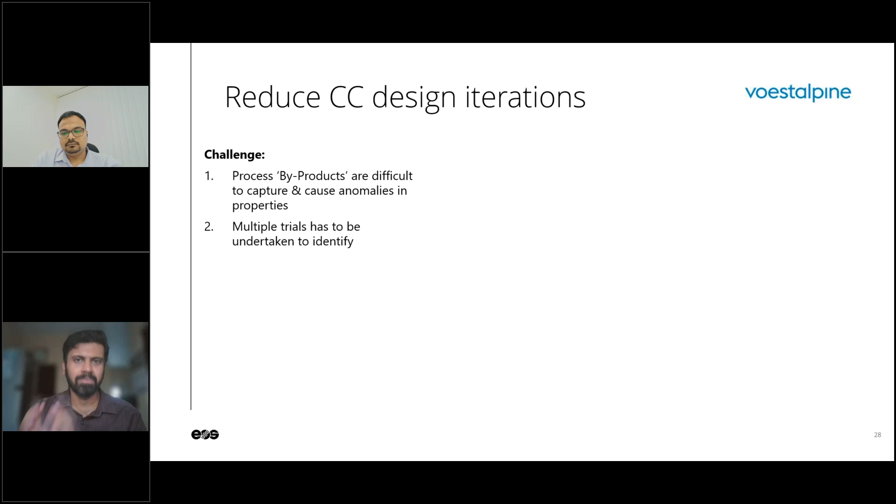Another thing comes from voestalpine, when they did the 789, the Corax material. So there are some process defects that come in. Typically when we talk in terms of castings, there are process defects such as blowholes, hot tear, things like that. Similarly, in additive manufacturing also, we have such process defects, for which, depending on geometry, they tend to do multiple prints, cut it, check it in lab, and see whether some process parameters have to be optimized or not.

What solution we offered was, instead of having to print it and process it after printing, we can directly check whether there's any anomaly, process-related anomalies that happen, such that the geometry is spoiled or not. What we do is we put a camera inside the machine and then understand whether the reflected irradiation are within the thresholds or not. I'll come to the next slide where you see how it works. With that particular identification or monitoring method, today we can directly say, even before the part is sent to lab to test it, whether this part will have a defect or not, soon after printing. To that level, we have reduced the cost of quality.

So how it works - this is called optical tomography, and the hardware that comes in is basically a CMOS camera, and it measures the reflected radiation.

The process works very simply, just like photovoltaic cells, the solar cells, right? The solar cells capture radiation from sunlight and produce electricity. Similarly, the laser works. Laser is also a light. It has some wavelength, and it captures that wavelength. The powder captures these wavelengths, and then some are absorbed, some are transmitted, and some are reflected back.

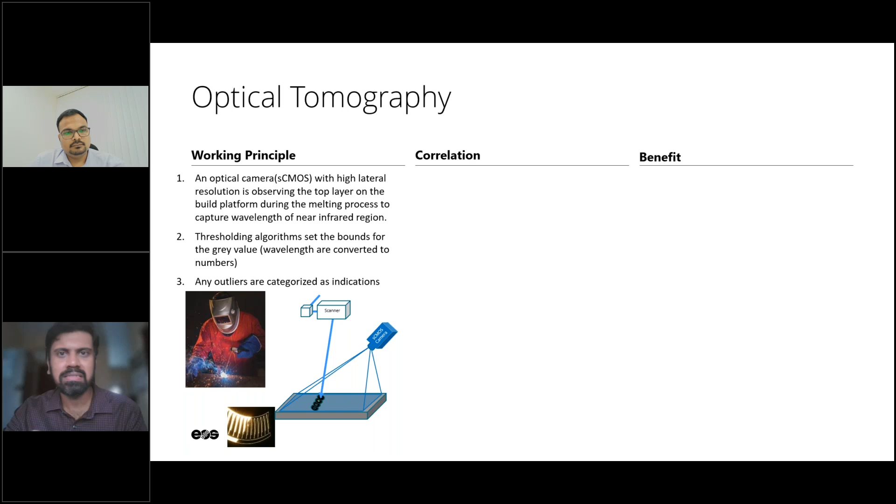So the sCMOS camera captures these reflected radiations, and it goes very close to the wavelength of the laser, and then checks whether this matches within the threshold set by the user. Any outliers from this threshold are captured as an indication. So there are two kinds of indications that come in.

One is called hotspot, the other is called cold spot. And for each of these hotspots, the user will say, okay, this hotspot could be a reason for that defect, or this hotspot could be a reason for so and so defect.

We have had some customers who encountered leakages when they did pressure testing. Basically, after spending near about 3 or 4 lakhs doing an industrial CT scan and so on, they identified it was a missing triangle in the CAD file. They spent 3-4 months and 3-4 lakhs just for a missing triangle in one CAD data. That's a big cost of quality. All this can be cut off with optical tomography.

There is one customer of ours, MTU. What they do is first calibrate the optical tomography, such that if they see any process defects - and these process defects are common to additive manufacturing, not just with us, but with every other OEM within this technology - they say you need not have the part checked for quality via radiography, but much before that you will know the places where you can expect defects. So if your defect percentage is beyond a certain limit, you reject the part directly.

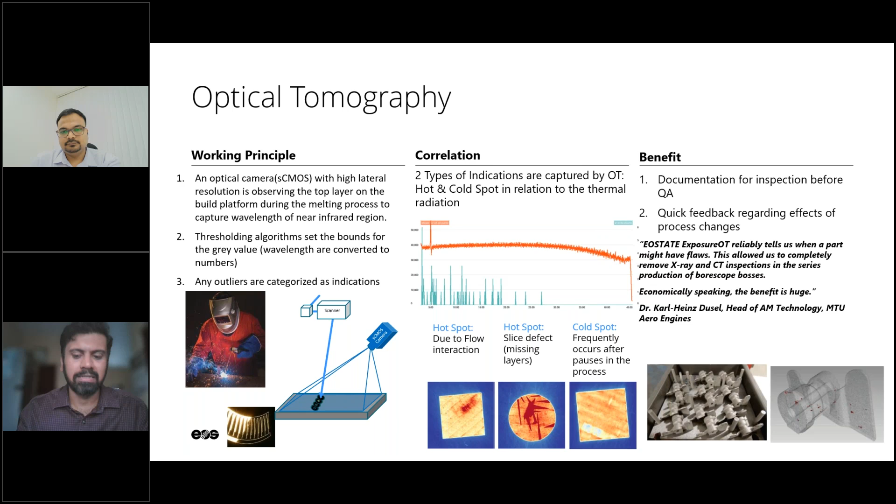Another interesting tool we offer, especially for tooling customers, is hybrid build. Sometimes when you see a part, it just has straight drills and doesn't require complex channels until the very top end. In that case, you can have that particular part already machined and fixed onto the machine, and then print only the conformal cooling segment.

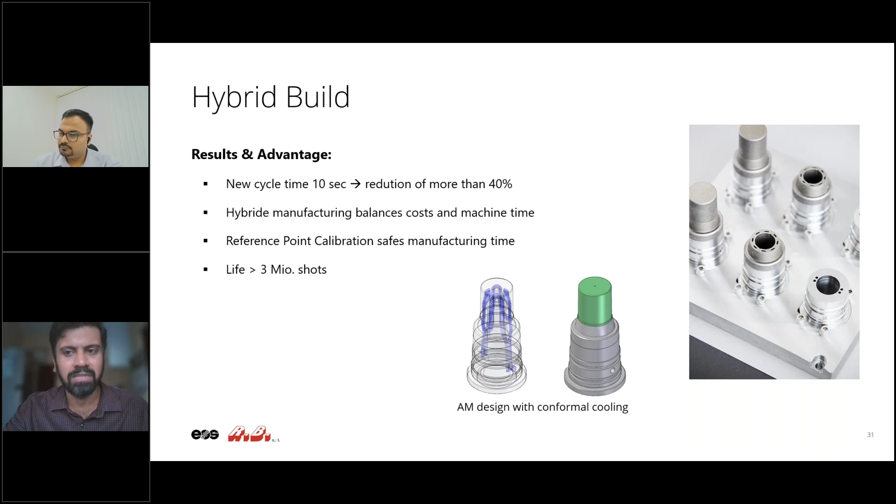This is one such customer of ours, and they were able to reduce from 18 seconds to 10 seconds on injection molding. And when we tend to fix it onto the powder, onto the machine, it should also reference properly and correctly. So for this, we offer a tool called reference point calibration, where you can have a quick referencing of these parts to start the build.

Some other customer stories on die casting: Toyota, along with NTT Data, were manufacturing compressor housings, going for 10 million shots or so. And they encountered one of the defects of die casting, which is soldering - basically aluminum gets stuck onto the tool. They tried deep drills and things like that.

Even with that, they were able to reduce it to a great extent, basically to half for such a defect, but it still had to be optimized. So with conformal cooling, now the soldering defect is zero. So when it comes to manufacturing, the tool does not have any soldering defects at all.

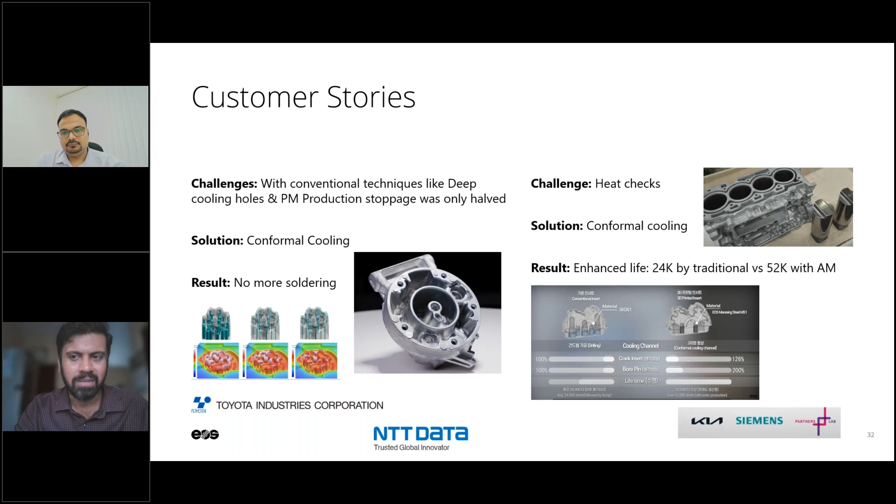Kia was also doing bore pins and crankcases, so tools for those, and they had heat checks and cracks. They were able to mitigate that with conformal cooling again. They said if you manufacture with SKD61, which is like H13 material, compared to maraging steel where you can have conformal cooling - the life with H13 is somewhere around 24,000 shots, and after that it has to be sent for maintenance. Whereas with additive manufacturing, the life is about 52K shots, no maintenance, still in the process. So that's the benefit of conformal cooling.

Typically, inductors are made through manual operations. They have sheets and tubes, such as standard profiles that come in, and it's a manual intensive process. When the geometry is a bit complex, these profiles are joined by brazing, and then it has to be finished. Minimum it would take roughly 3 to 5 days to manufacture one such part, and when multiple operators work, it increases linearly. But with additive manufacturing, you could make all such parts as one single job, with very complex profiles directly 3D printed.

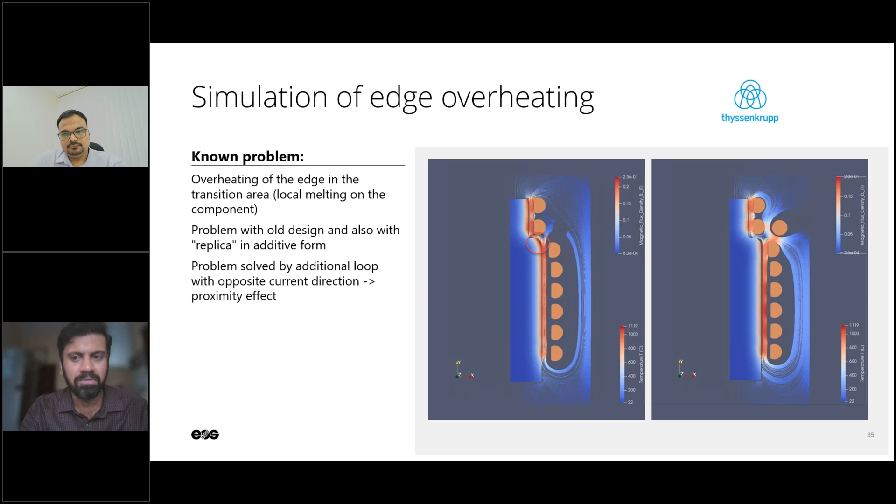When it comes to life, people come to us saying ETP copper has such high conductivity and the cost of manufacturing is far cheaper, so how do we address the cost topic? We use commercially pure copper, which has electrical IACS of almost 100%, just like ETP copper, and our lifetime is 40,000 pieces, simply because we're able to get rid of the brazing. We have uniform geometry throughout, so our density is uniform, and we have much better life because of that.

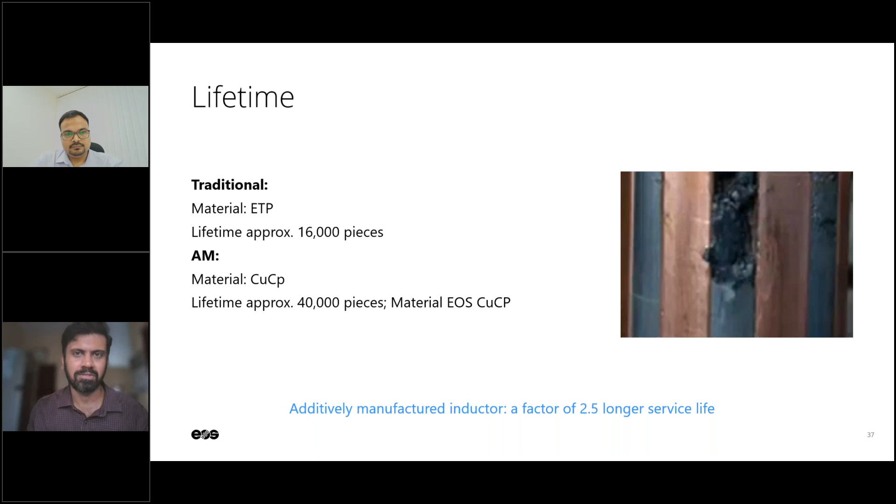When we traditionally manufacture, because of brazing and overheating, the coils get spoiled and come for repair, just like injection or die-cast molds. There's a repair turnaround time and a cost to it, or sometimes the tool is completely thrown away and a new tool is used. So we have a very limited lifetime for the tool, and we keep needing multiple tools for the same job over many pieces. But with additive manufacturing, it's just a one-time investment, so we're able to amortize the cost of multiple tools in the traditional way versus one single tool with additive manufacturing, where we also have uniformity in flux. That's the benefit we have.

If you have any questions, I'm here to address them. If there is no time, then probably you can directly address it to me also. Thank you very much.